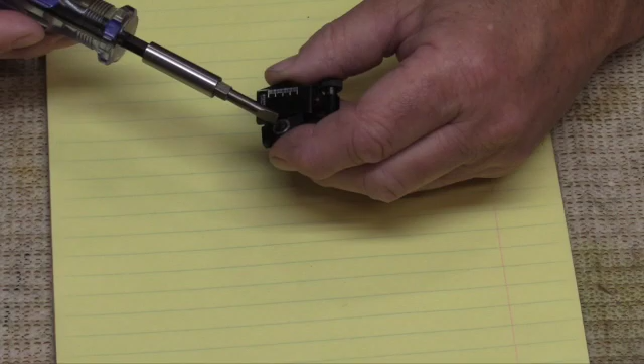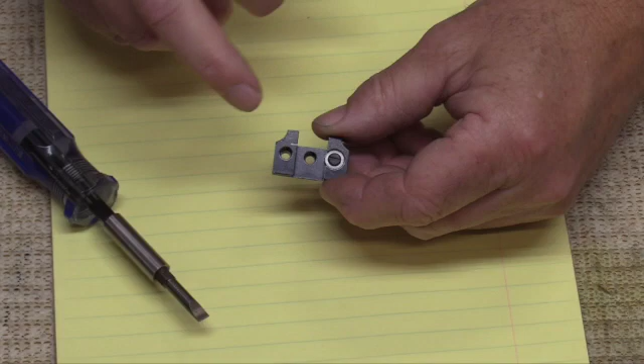Okay, the top part of the sight is held in with this screw and a dovetail, so you loosen that screw and the top part comes right off. You can set that aside, and that exposes 2 holes here, and these are the 2 that we're going to use to hold the sight onto the gun.

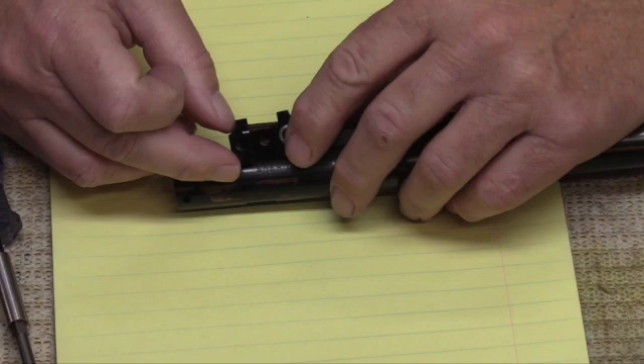So what we're looking at is something like that, and we want to locate the screws. There's a flat on here on the side of the receiver, and that's what we're going to use — not the tube, because that would kind of tilt it. So we're going to use the flat, and we're going to put the holes in. The rear hole at least 1/8 of an inch, maybe even 1/4 of an inch, and then this hole here will be well back from where that spring is in the bolt. So that's how we're going to mount it.

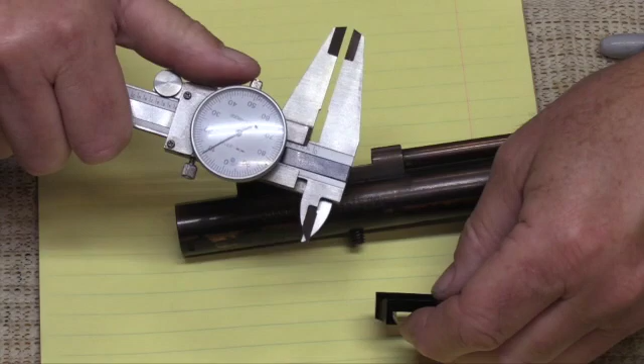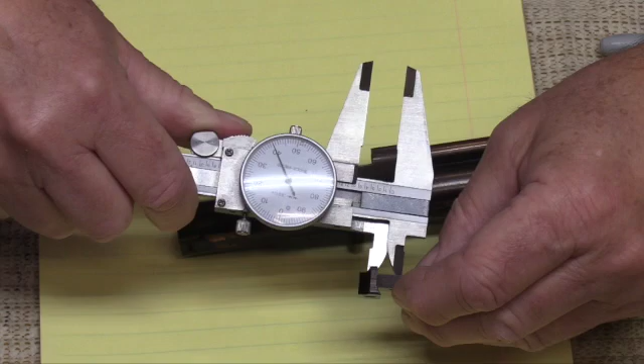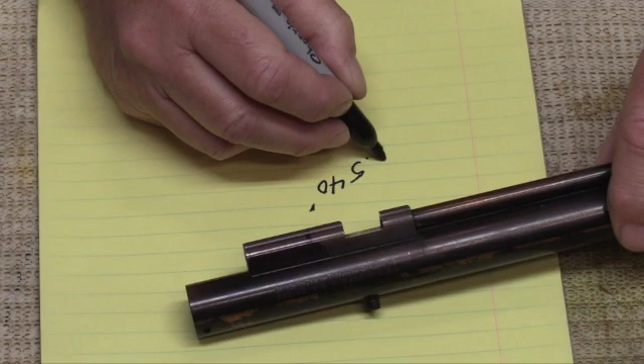Now, how far apart do we space the holes? Let's take a look at that. The holes from the outside edge of each hole to the outside edge of the other one is about 540 thousandths of an inch. I know you're looking at this upside down, but can't help that at this point.

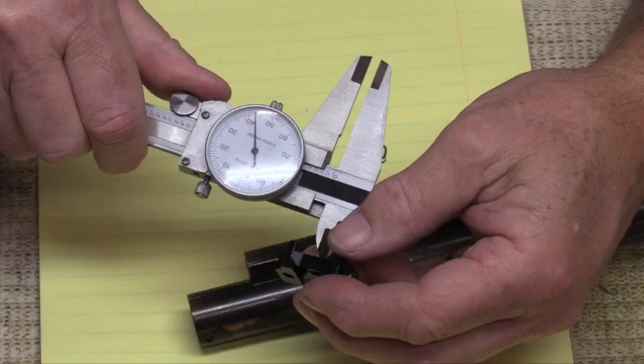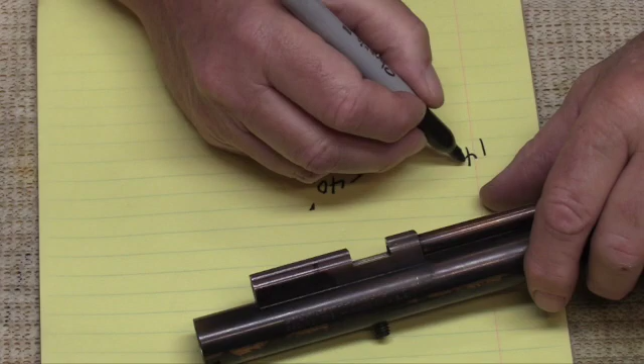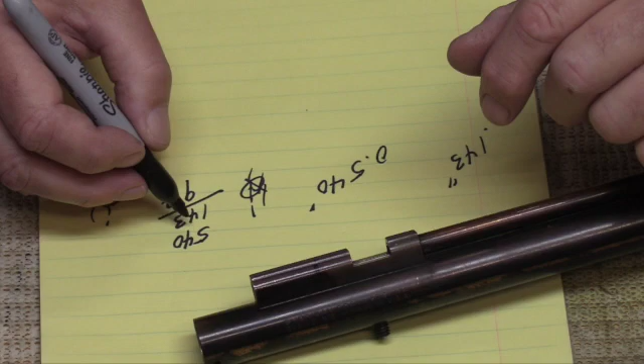Each hole is about 143 thousandths of an inch. The way you determine the spacing is you look at this hole and this hole, and we want to drill right in the center. We know the distance from outside to outside is 540 thousandths, and each hole is 143. If you take half of that hole out and half of that hole out, you can just subtract that 143 from the 540.

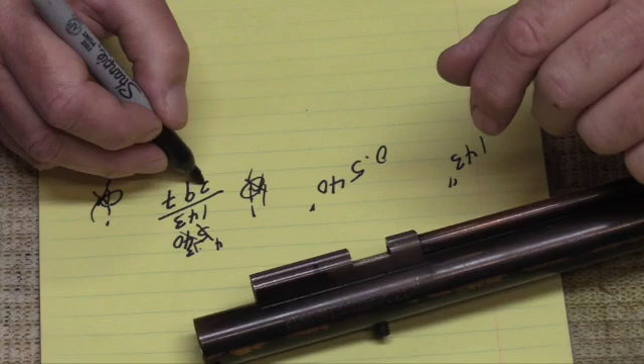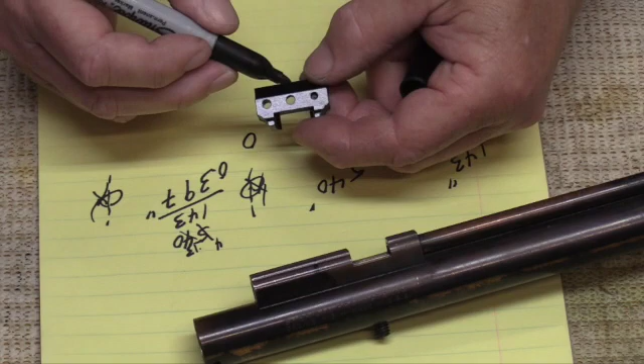So we're looking at a hole here for this one, and we're going to drill that, and we're going to drill the other one 397 thousandths away from it. So center of that and center of that, and we're going to call that 400 thousandths.

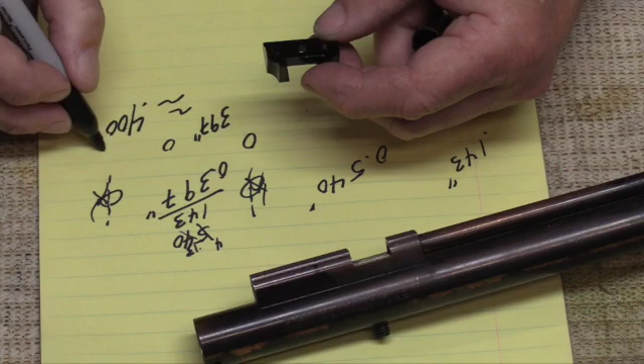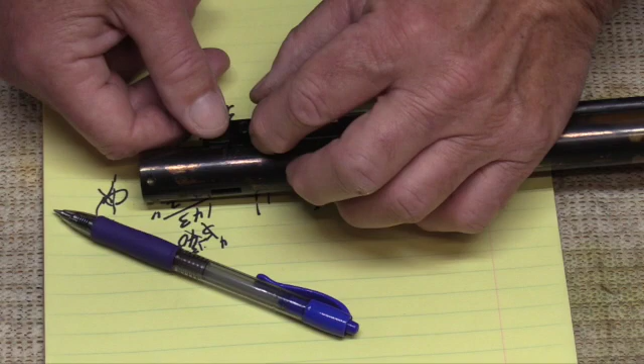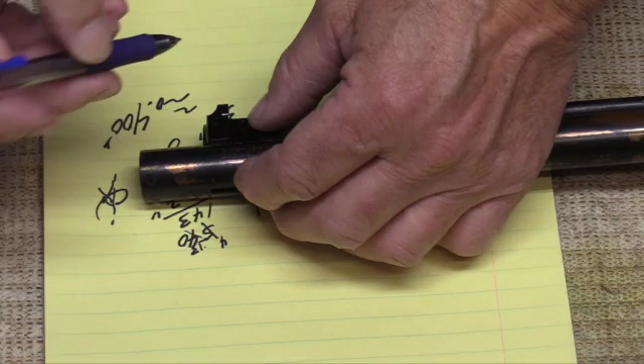Well, in preparation for the milling, one thing I often do is just kind of draw out where things go. If we get onto the flat here, I put a piece of tape, and approximately locate it, so the rear hole is somewhere 1/8 to 1/4 of an inch in front of the receiver. We can mark one of the holes, which is what we've got here, so we can set it up and drill and tap that hole, move back 400 thousandths and drill and tap that hole, and we'll have our receiver set up for the sight.

Now, one thing, when you're drilling into a tube like this, you're liable to raise burrs on the inside, or you'll get chips and swarf from the drilling and tapping. You don't want them to go down inside of the tube. So I found a pencil from Lowe's Building Supply, says Dixon on it, and it actually fits very tightly into the tube. We're going to use this to catch any chips or swarf, drilling right into it so that we hopefully don't raise burrs, or very small burrs if we do, and keep the inside of the receiver clean.

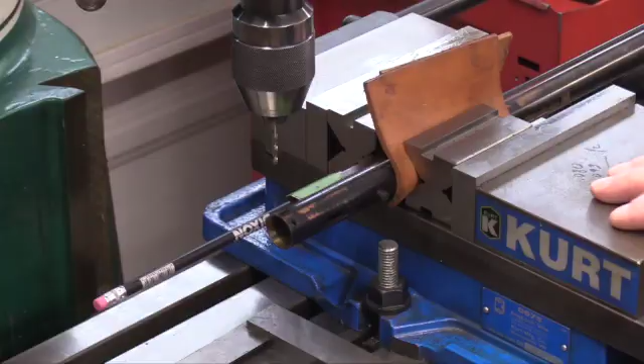Alright, we're at the milling machine. We had some audio problems with the machine and the harmonics, so we're doing this voiceover. It's in the vise, got our leather to protect the receiver, it's held securely, got our drill set up, got our tape with our initial point identified, we've got our pencil in there to protect from burrs, and we did a visual alignment using the top of the receiver so that we could drill straight down into the receiver. We don't want to drill at an angle.

So now we just have to find our first point, and we're going to do that visually as well. We could indicate off the top of the receiver and the back of the receiver, but this is actually going to work just fine. And I know you're saying, why don't you just drill the doggone thing?

So here we go, getting ready to drill, and checking to make sure that our drill is roughly where the first dot was that we put onto the green tape. And now here we go. You can't hear it, but we're peck drilling - go down a little bit, come back out, down a little bit, come back out - until we start seeing the wood chips come out from the pencil, and then we know we've gotten through.

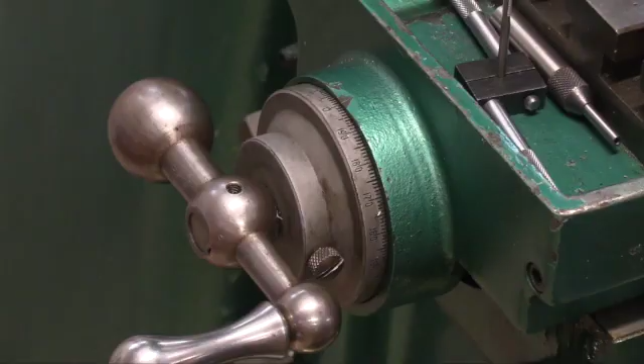Okay, the next part of this is to move it 400 thousandths to drill the other hole. We have a dial on this machine, we've taken the backlash out, and every revolution of this dial is 200 thousandths. So we go around twice, and we are pretty precisely aligned for that second hole.

Alright, so here we are drilling that second hole after we've moved the receiver by 400 thousandths of an inch, and we'll take that through. I actually blow on it so I can see what chips are coming out of the hole, and when we hit the pencil, the wood, again, I'll know that we're through, and don't go any deeper.

That's plenty. Okay, so we've got our tap here and our tapping wrench. We're just going to take it down here, put a little pressure on it, and we want it to go straight into the hole. This essentially directs it so you can't get it off, and it puts a little pressure downward on it.

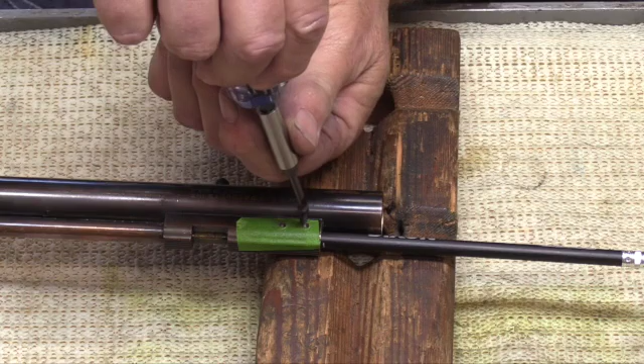Alright, well, we've done as much damage to this receiver as I think we can. Let's see if the screw fits. And it does. Okay, we're good there.

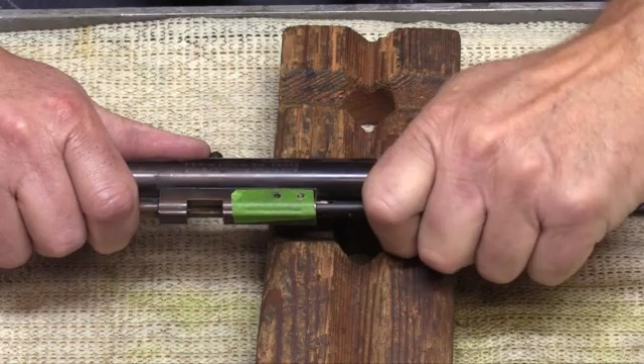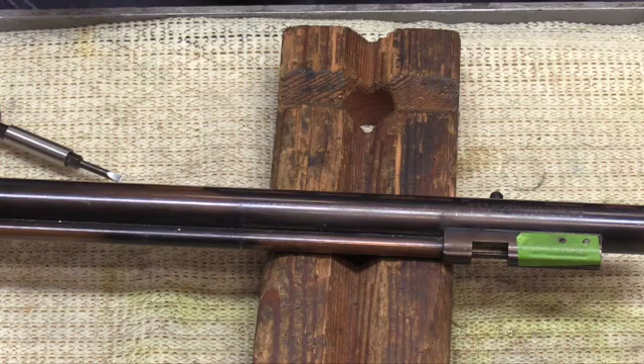So we're going to pull the pencil out. And you can see we drilled and tapped the pencil for those threads. So that looks pretty good. If there's a burr on the inside, you can use a dental burr - put it right through the hole if you got one small enough, and just kind of clean it up. I don't have any, so I do have a set of these Swiss pattern files. This is kind of a half round, and if I need to, I can go in there and clean those up. But visually they look pretty good - I don't see any burr on them at all.

So let's see if our sight fits here. How does this thing go? It goes like that - here we go. And there's a short one and a long one. I think the short one goes in the middle. Okay, and then the long one, I believe, for the back here. And neither one of them is sticking into the receiver, so I think we're good.

Okay, next we put the upper unit in, and we've got to catch this dovetail on this side, just right there. Let's see if I can get it. Alright, we're in. And there's our peep sight. Now I'm going to take this off and finish rebuilding this gun. But okay, that's how you do it.

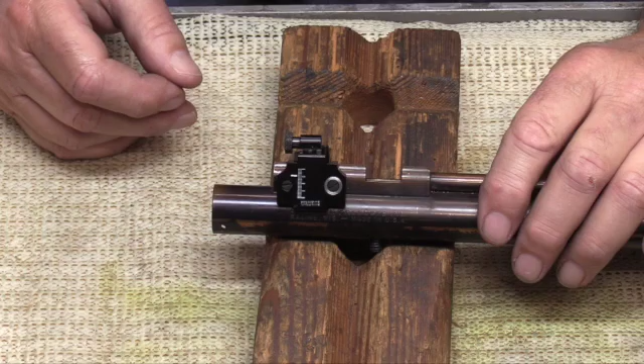If you're doing it at home, I really like the tape method, where you can set a piece of tape on there and locate the two holes. If you don't have a milling machine or something, I think the main thing is to get it held somehow tightly and securely, and to do it on a drill press rather than by hand, and you should be okay. Don't forget to use something so that you don't get burrs on the inside, and if you do get burrs, you can always use a file gently.